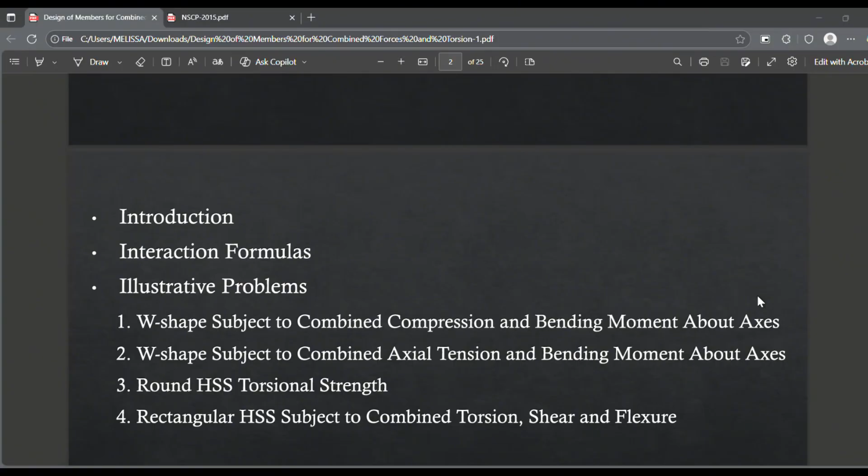In this video, I will be discussing Unit 6, which is the design of members for combined forces and torsion. We will have a short introduction, discussion of the interaction formulas, and 4 to 5 illustrative problems. After careful study of this unit, students should be able to identify different combinations of loading subjected to a structural member, compute critical stresses due to combination of loads, and design and analyze structural members for combined forces and torsion.

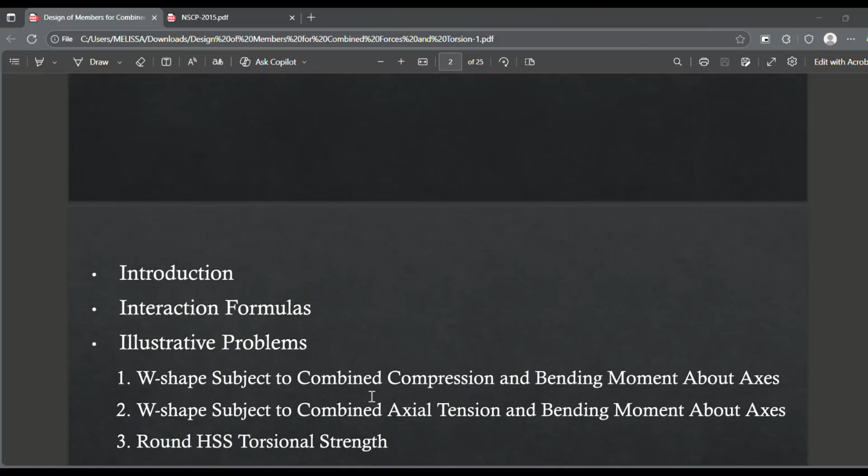This topic is a review of what we discussed in Chapter 2: tension, flexure, compression, and shear. This is now the combination of all the loadings that our structural members can experience, combined with torsion. Technically it's simple - we'll just add one formula, the interaction formula, which describes the interaction of forces and stresses experienced by our elements. Let's proceed to the introduction.

While many structural members can be treated as axially loaded columns or as beams with only flexural loading, most beams and columns are subjected to some degree of both bending and axial load. As discussed previously, elements that experience both axial and flexure are known as beam columns - members subjected to both flexural loading and axial loadings.

Columns that are part of a steel building frame must resist both bending moments in addition to the usual compressive loads due to the following: eccentricity of the compressive load, columns geometric imperfections, and wind and other lateral loads.

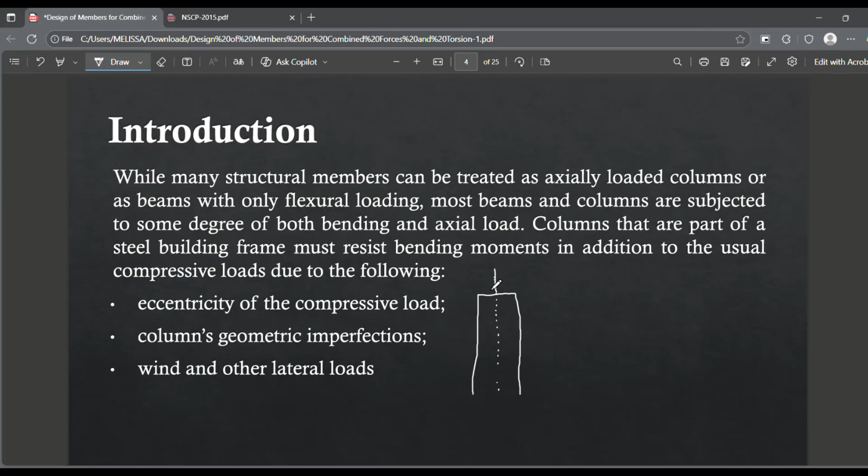We assume that our columns are subjected purely to compression. But in some instances they also experience bending moments because of eccentricity - meaning the loading is not applied directly at the center. Assume this is our column, perfectly straight, and this is the center axis. In pure compression, we assume the load is directly applied on that axis.

But due to eccentricity, there's what we call an offset. The load, instead of being at the center, is subjected somewhere off-center - that offset is what we call eccentricity. So if you have a load at that portion, aside from compression, the column can also bend, since the loading is not centered. That is the eccentricity of the compressive load.

Next is columns' geometric imperfections. The columns we construct are not perfectly straight, especially if made of concrete, due to the formwork for example. So even during construction, there's already some initial bending, which worsens once load is applied.

And then, of course, there's wind and other lateral loads - an example being earthquake loads. Our columns and elements have lateral loadings due to wind, and another example of lateral loads is earthquake loading, or the swaying of frames, also called sidesway forces. These are the three common reasons why our columns experience bending.

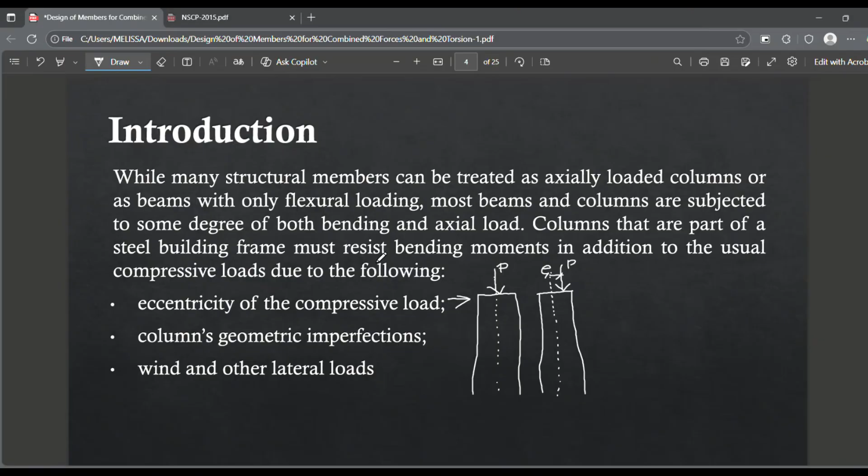Now we have the interaction formula - the relationship between required and available strength. Required strength over available strength must be less than or equal to 1.0. This is what we want as a designer: the required loading over what the element can provide must be less than or equal to 1.0, which holds true if the denominator is greater than the numerator.

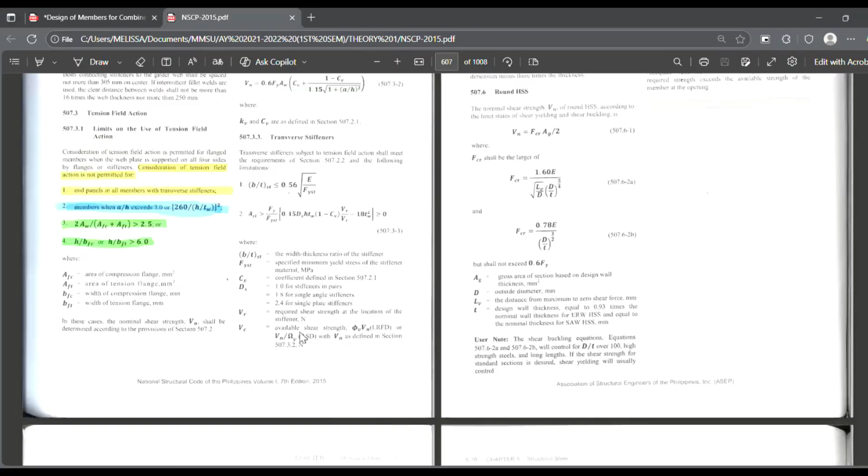So this formula is in our NSCP. Let's open our NSCP on section 508. This one, section 508. So we have here interaction formulas. Let's go one by one, we have 508.1.

This is for the doubly and singly symmetric members subjected to flexure and axial force. So 508.1 is divided into two, because we have two kinds of axial force. We have here for compression, and then another one is for tension.

So, the NSCP adopted our general formula, on which we have two cases here. If Pr over Pc, or the required strength divided by the available strength, is greater than or equal to 0.2, we will be using this formula. And then, if it is lesser than 0.2, this is the one we will use. So for the first formula, it is intended for large axial loading, and then the second formula is for small axial loading.

So this 0.2 here, there is an assumption from the AISC that at 20% of the Euler buckling load, the column deflection is minimal. So 20% is what we assume so that the bending is safe or acceptable, 20% of the available flexural or the available axial loading. So that's the code basis, the code limit of that 0.2. NSCP just adopted it.

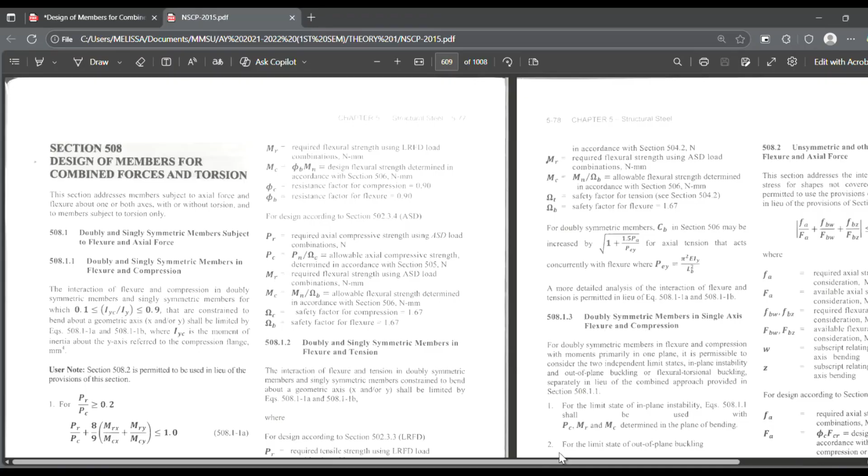And then, there are just some limitations here. We'll discuss that further in our examples. Now, we have here 508.2, unsymmetric and other members subject to flexure and axial force. This section addresses the interaction of flexure and axial stress for shapes not covered in section 508.1.

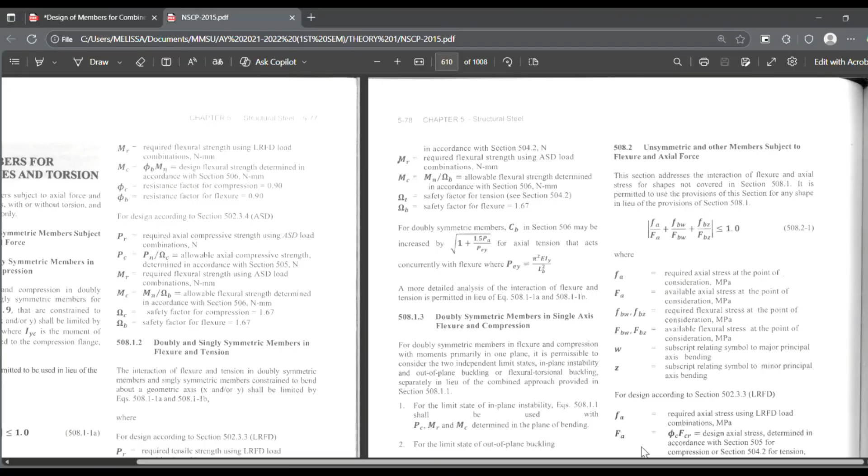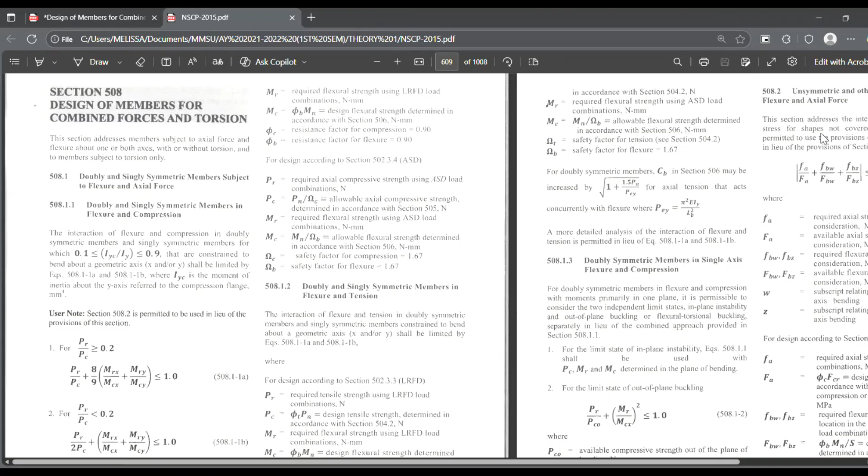It is also permitted to use the provisions of this section for any shape in lieu of the provisions of section 508.1. So 508.2 can be used as a substitute for 508.1. As noted in 508.1, section 508.2 is permitted to be used in lieu of the provisions of this section. The same is said by 508.2, so we can use 508.1 instead.

Okay, so here is its formula. What's the difference between the two? Why can we use them interchangeably? In 508.1, you'll notice the units are in Newton and Newton-millimeter, so we are talking about forces and bending moments. In 508.2, the units are in megapascal, meaning we are talking about stresses.

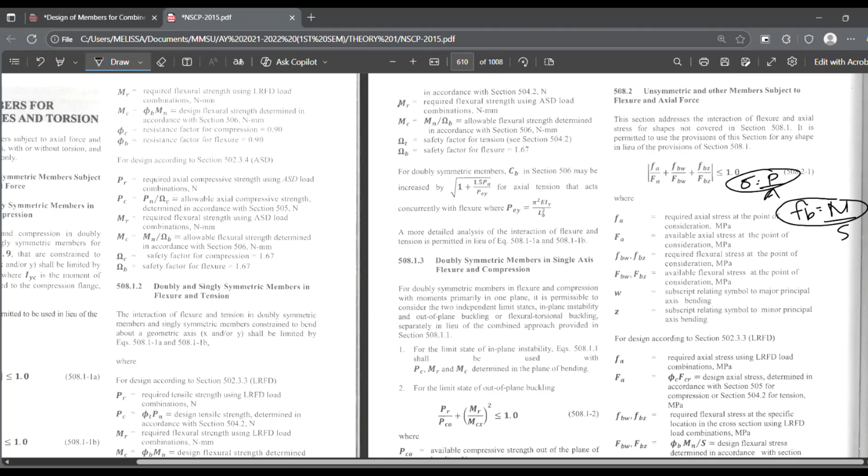So whichever you use, 508.1 or 508.2, it will most probably yield the same result. Because we know that the force or the stress is directly proportional - if we have axial stress, it is directly proportional to our load. And if we have bending stress, it is also directly proportional to our moment. So we can use either 508.1 or 508.2, depending on what the problem asks us to apply.

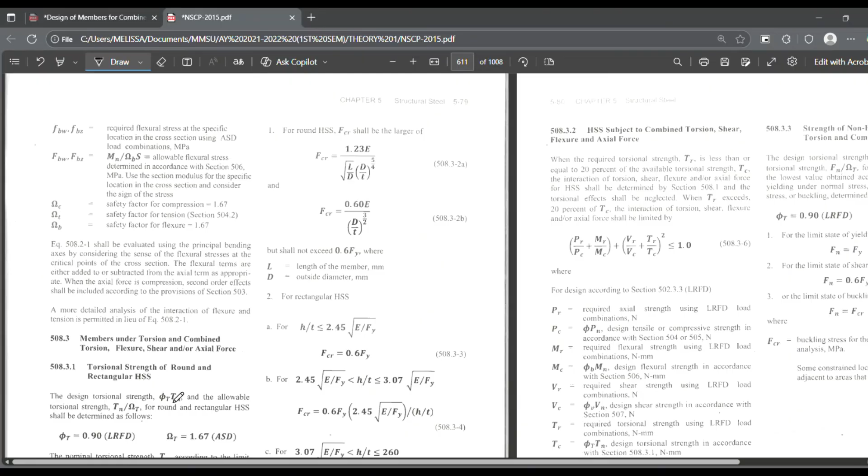Next, 508.3, we have members under torsion. Here torsion comes in, and then the combination of torsion, flexure, shear, and other forces. And of course we have HSS and so on. So let's go back to these provisions from NSCP as we proceed to our examples later on.

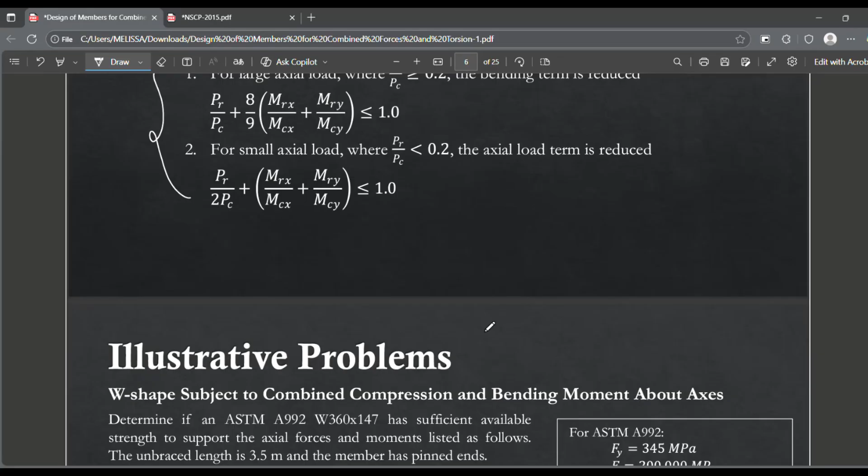So our PR required, how do we compute that? PR, MR can be computed using what we use, that is the PU - 1.2 PD plus 1.6 PL. Usually this is what we use, so this is our required PR. For LRFD. For ASD, of course we have PD, the dead load plus live load. The moment or the flexural strength is also the same as how we get it during flexure.

What about the PC, the available? How do we compute that? With the use of the limiting states. So this is just a review of what we've done from Unit 2 up to shear, just a refresher. Except it's a bit more laborious because we are not only dealing with one force or one stress anymore - we are dealing with two or more forces or stresses. So every problem may take more than 30 minutes to 1 hour.

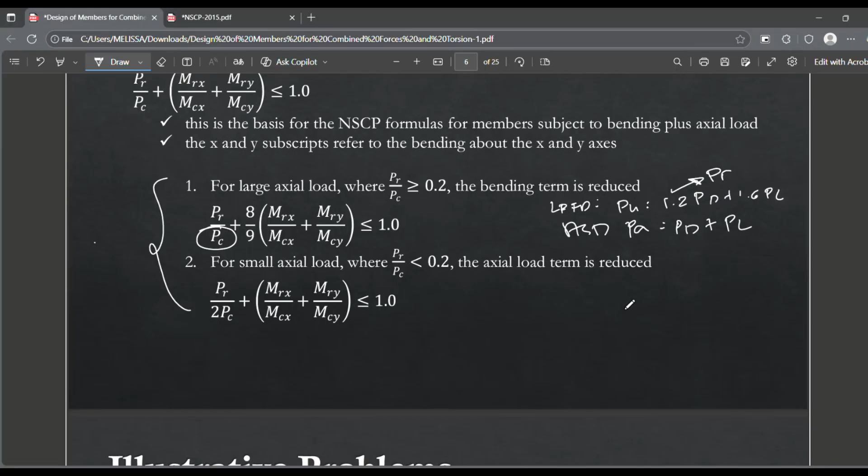Okay, let's have illustrative problem 1. We have a W shape subject to combined compression and bending moment about an axis. Determine if an ASTM A992 W360 by 147 has sufficient available strength to support the axial forces and moments listed as follows. The unbraced length is 3.5 meters and the member has pinned ends.

So given are our required values - these are the required forces and the flexural strength - no need to compute for the required. I've also given here the geometric properties of our section. So let's start. Again, this is the combination of compression and bending moment or flexure, so compression plus flexure. Let's begin with compression.

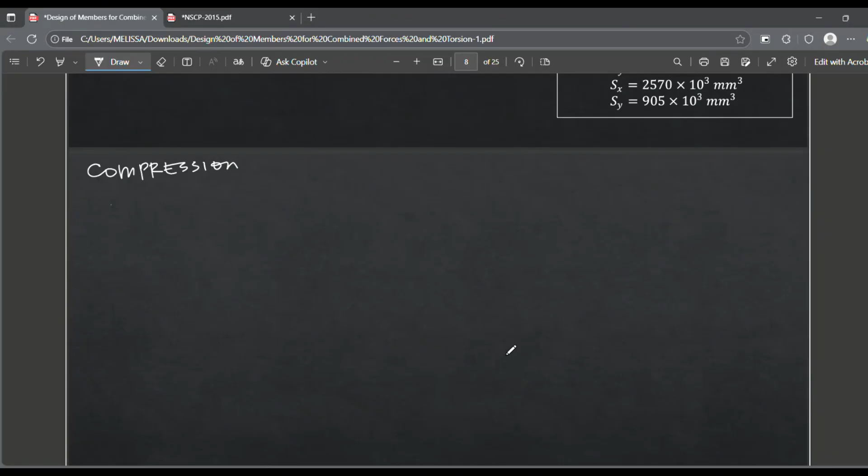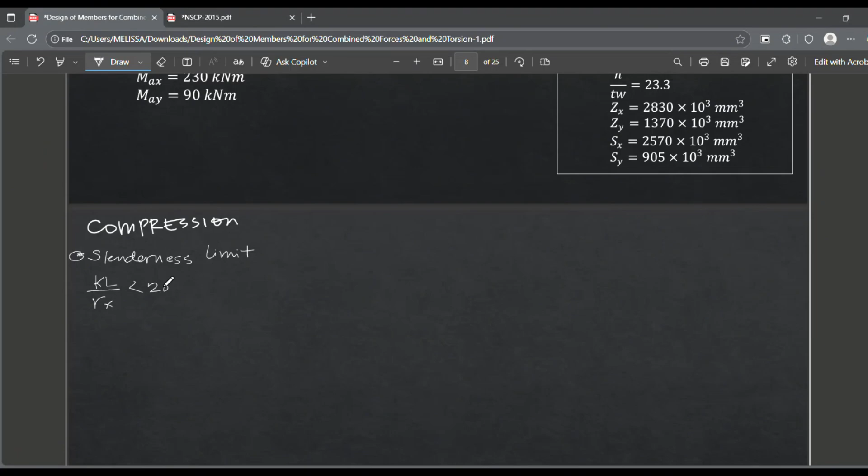In compression, the first step is to check the slenderness ratio, or slenderness limitation. We have KL over R along X must be lesser than 200. Our section has pinned ends, therefore K is equal to 1.0. The length, we have 3,500, divided by Rx which is 157. So this is equal to 22.293, which is lesser than 200 - passed.

Next, KL over RY. We have 1.0 times 3,500 divided by 94.2. So we have 37.155. They are within the limit, but this one will govern.

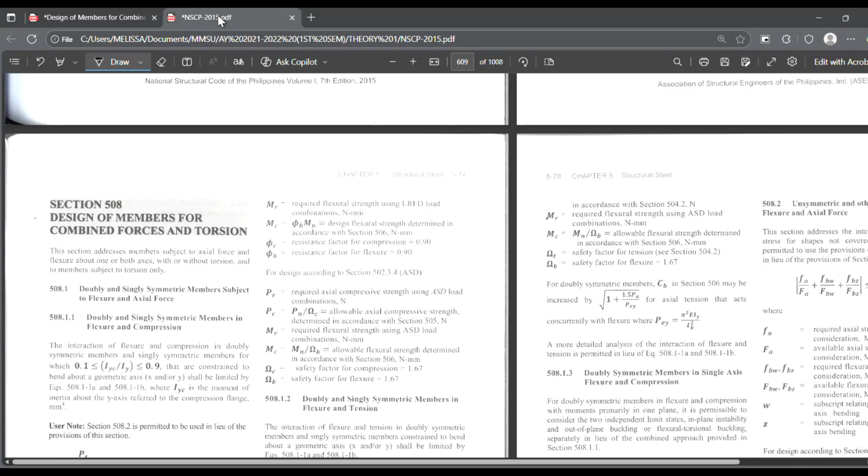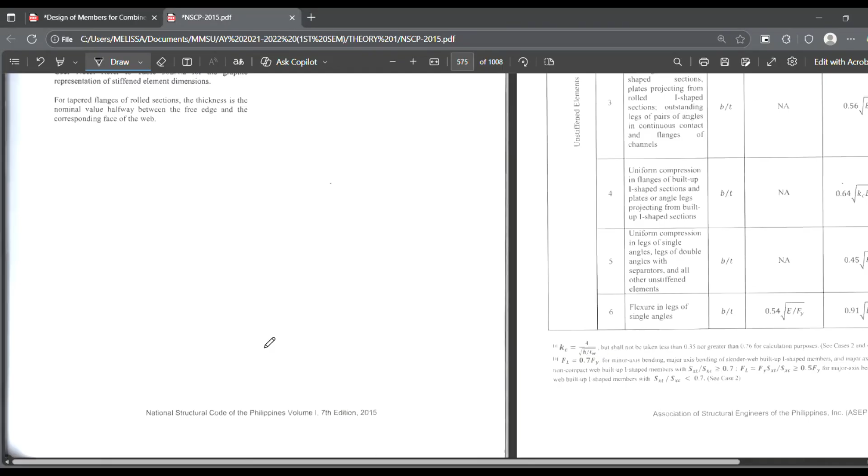Next is to check the slenderness of the elements. Our section is a wide flange, so we have unstiffened and stiffened elements. Let's start with the flange for the unstiffened. Open your NSCP on section 502, table 502.4. We have unstiffened elements for flange, wide flange, so we will utilize case number 3 with thickness ratio B over T, and then we have 0.56 times the square root of E over FY, case 3. For the web, I think we have case number 10 - uniform compression in webs. So this is the width thickness ratio, and this is our lambda R.

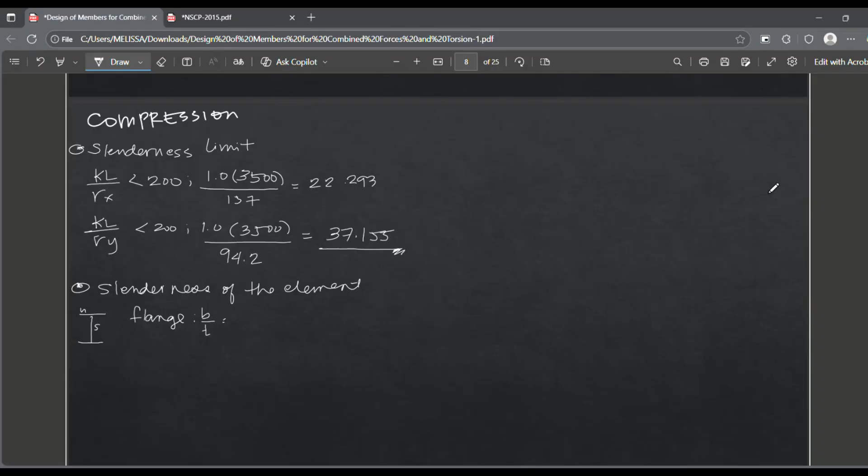So flange. We have B over T equal to BF over 2TF, which is equal to 9.34.

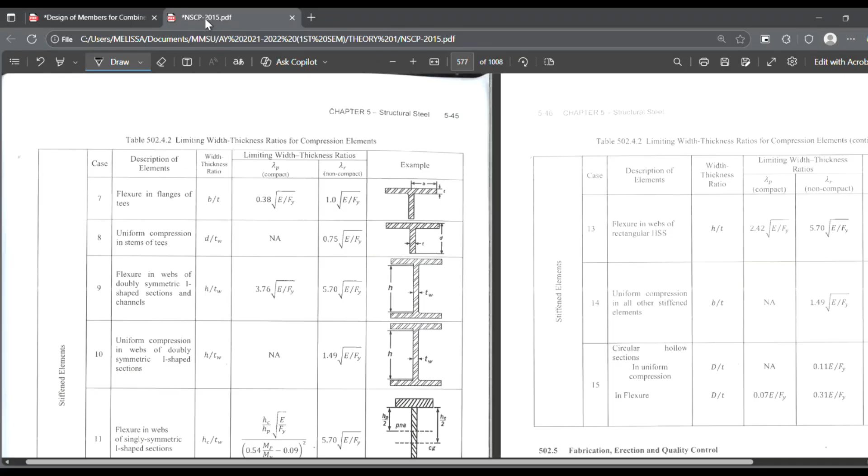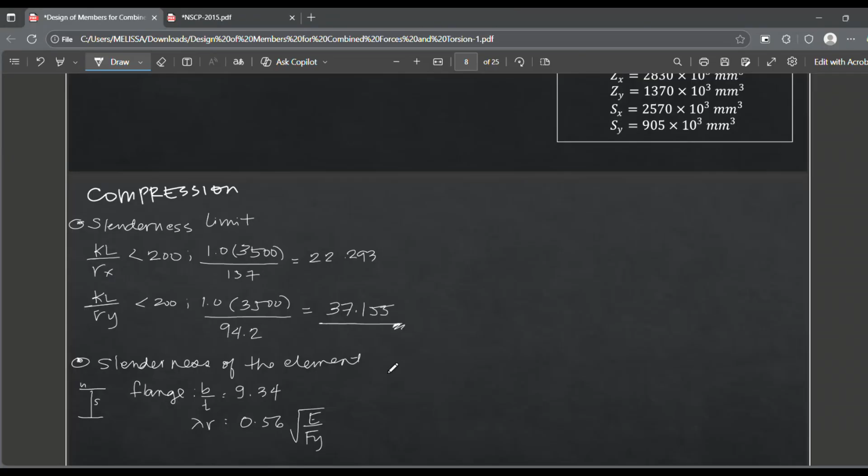Next, the lambda R for the flange. We have 0.56 times square root of E over Fy. Our modulus of elasticity is 200,000, and our material is A992, so Fy is 345. Computing this, we get 13.483. Therefore, this section, the flange, is considered non-slender.

Next is for the web. We will use case number 10. So H over TW, thickness ratio is 23.3. And the lambda R is equal to 1.49 square root of E over Fy, which computes to 35.875. So both are non-slender.

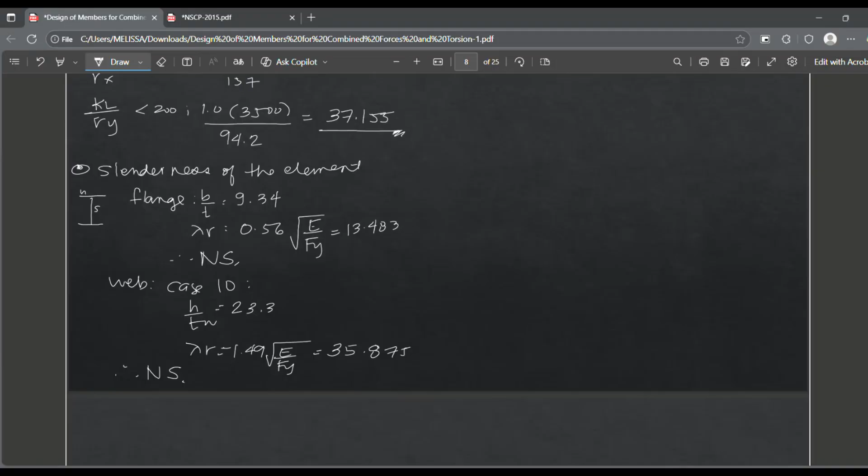So the flange is a non-slender element and the web is also a non-slender element. After that, let's proceed to section 505, design of members for compression. Since both are non-slender, let's check section 505.3: compressive strength for flexural buckling of members without slender elements. This section applies to compression members with compact and non-compact sections, or non-slender elements as defined in section 502.

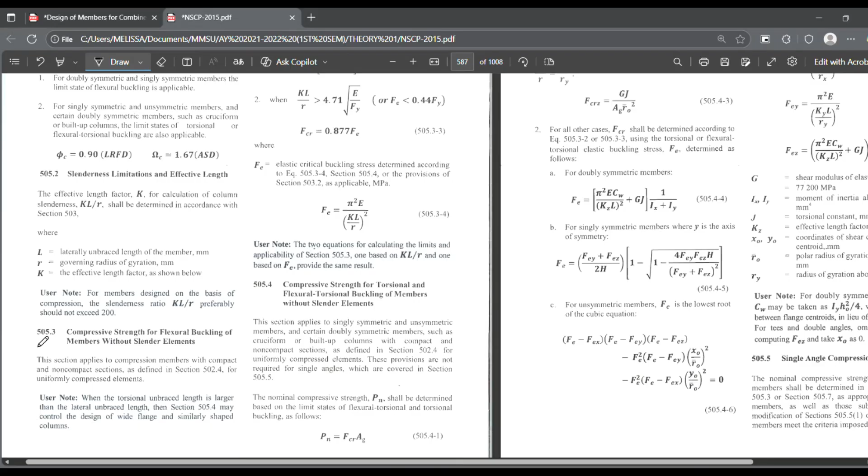So it falls under 505.3. Next, 505.4: compressive strength for torsional buckling without slender elements. This section applies to singly symmetric and unsymmetric members, and certain doubly symmetric members such as cruciform or built-up sections. Our section is a wide flange, doubly symmetric, but it doesn't fall here because it needs to be cruciform or built-up. Therefore, only 505.3 is applicable, where the nominal compressive strength is equal to FCR times AG.

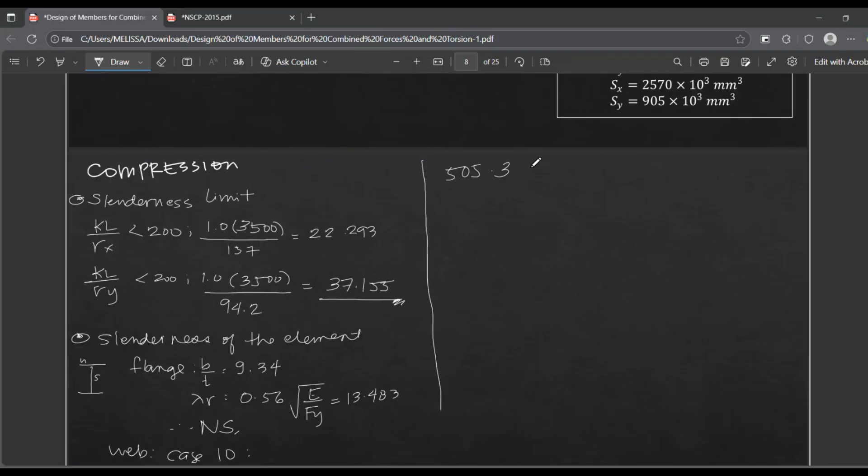But before we compute FCR, we need to compare the elastic critical buckling stress with 0.44 Fy, and see where it falls. Under 505.3, the limiting state is flexural buckling, where the nominal compressive strength equals FCR times AG. We compare with 0.44 Fy. Our Fy is 345, so 0.44 times 345 is 151.8 megapascal.

Next is the elastic buckling stress: pi squared E over (KL over R) squared. So pi squared times 200,000 divided by the governing KL over R, which is 37.155 squared. Therefore, this is equal to 1429.866 megapascal. Therefore, our Fe is greater than 0.44 Fy.

Therefore, our FCR uses the formula 0.658 raised to Fy over Fe, multiplied by Fy, since Fe is greater than 0.44 Fy. So 345 divided by 1429.866, multiplied by 345. This is equal to 311.861 megapascal.

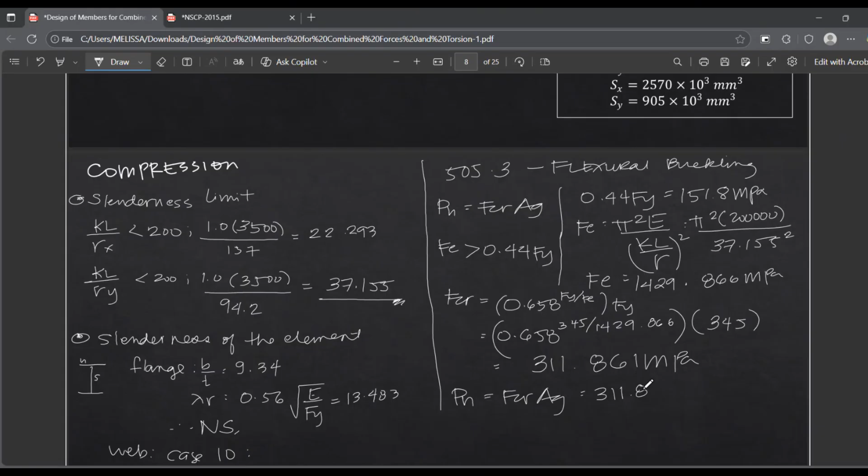Therefore, the nominal compressive strength is equal to FCR times AG. So 311.861 multiplied by the gross area, 18,800 millimeter squared. This gives Newton per millimeter squared, which cancels out. Let's convert into kilonewton: we get 5862.98 kilonewton.

But we need under LRFD the design strength, phi Pn. Our phi is 0.9, so this is equal to 5276.68 kilonewton.

So phi Pn, the design strength, is 5276.68 kilonewton. And then under ASD, we have Pn over omega, which is 3510.765 kilonewton. So these are now the available strengths.

So what is the required? That's the given: required under LRFD is 1,900 kilonewton, and under ASD is 1,200 kilonewton. So it's safe, since 5276.68 is greater than 1,900 kilonewton, and 3510.765 is greater than 1,200 kilonewton. In summary, this is what we call PC, the available, and the 1,900 and 1,200 are what we call PR, the required. So it's safe for compression.

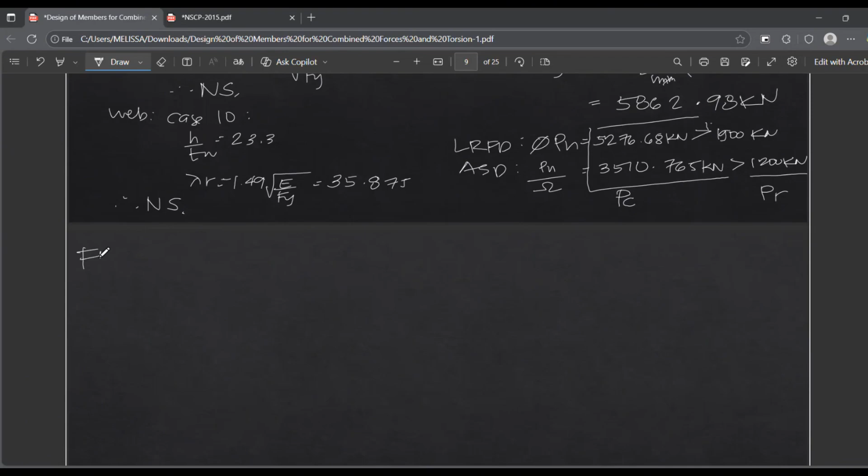Now, the problem gave us the required moments. We notice we have moment along X and moment along Y, meaning the bending is happening on both axes, X and Y. So what we'll do is identify the flexural strength along the X-axis first, then do the weaker axis later. This is going to be a long task. So, flexure—what's the first thing we do for flexure?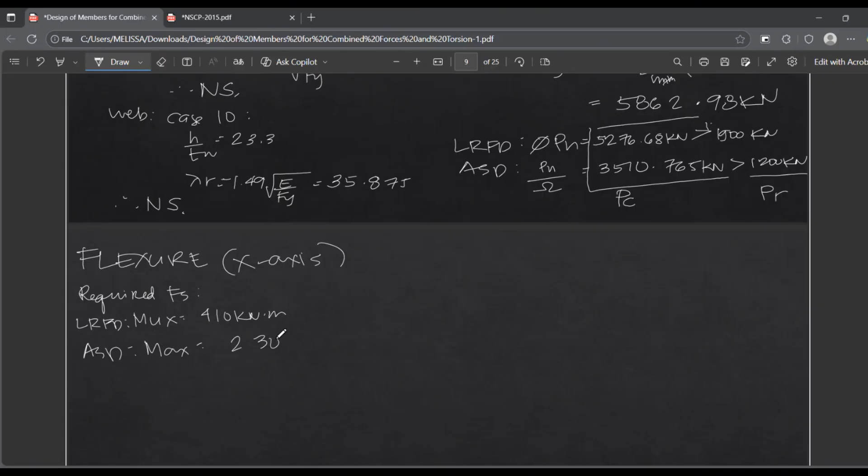Okay, given na yung required. Required flexural strength, under LRFD we have 410 kilonewton meter. And for ASD, we have 230 from earlier. So max is 230 kilonewton meter. 410 and 230. Next is the slenderness.

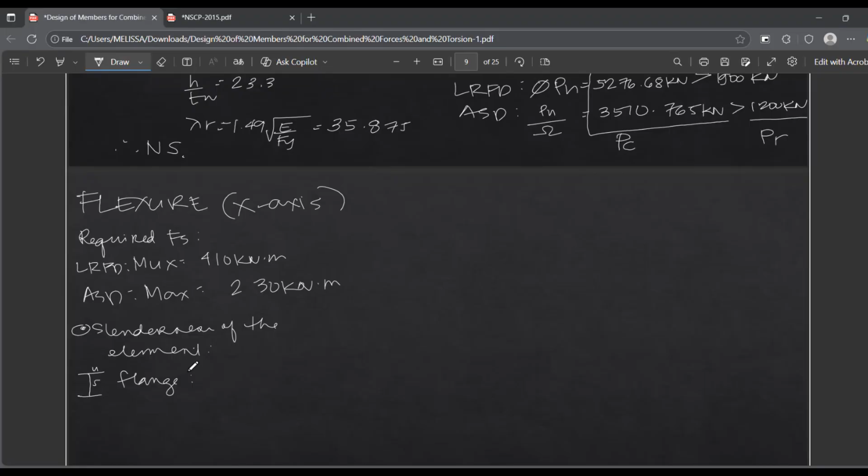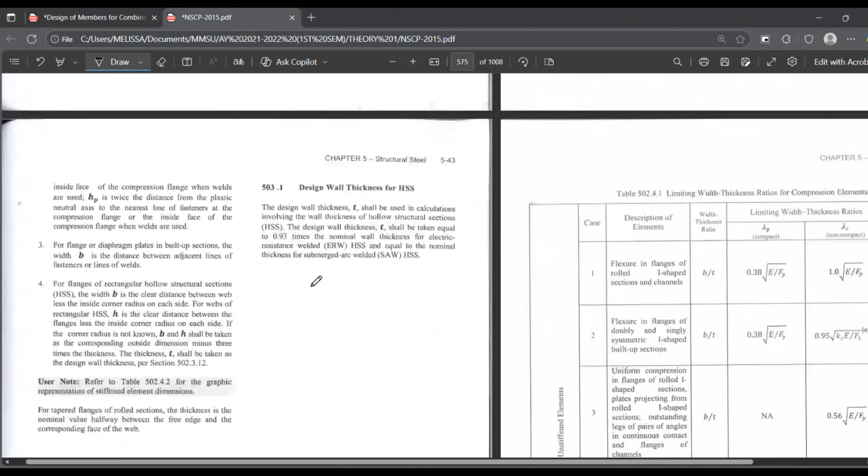Slenderness of the element. We're in flexure now, so let's start with the flange, unstiffened. Flange is different here since that was for compression; now we're in flexure, so table 502.4.2, case number 1: flexure in flanges of rolled I-shaped sections and channels.

We have the width-thickness ratio, B over T. Lambda P is 0.38 square root of E/Fy, and Lambda R is 1.0 square root of E/Fy. That's for the flange. For the web, continuing so we don't have to go back, we use case number 9: flexure in webs of doubly symmetric I-shaped sections and channels. H/Tw, with 3.76 square root of E/Fy and 5.7 square root of E/Fy.

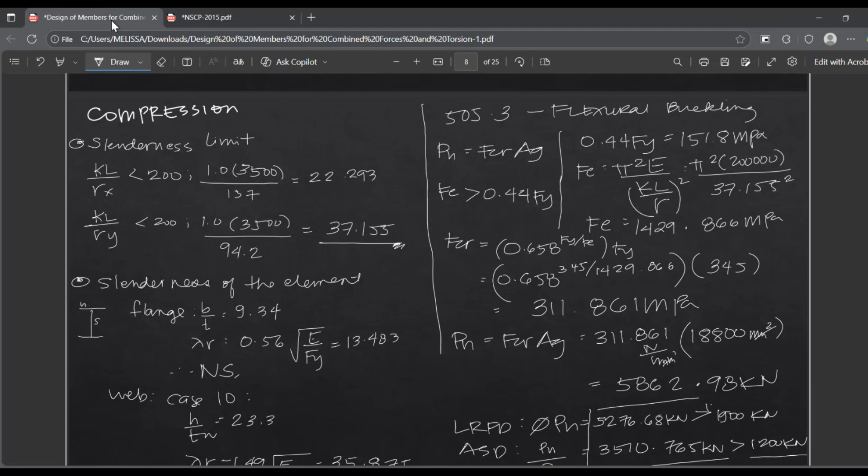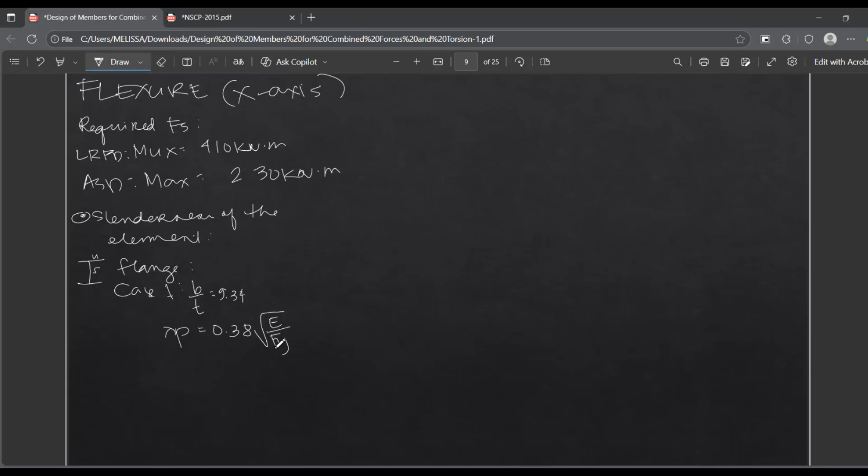Let's start with the flange, case number 1. Our B over T is just BF over 2TF, which equals 9.34. Next, Lambda P equals 0.38 square root of E/Fy. With Fy equal to 345, we get 9.149. So 9.34, or B over T, is greater than Lambda P.

Therefore we need to compute Lambda R, equal to 1.0 square root of E/Fy, which equals 24.072. So B over T is 9.34, Lambda P is 9.149, Lambda R is 24.072. Therefore the flange is considered non-compact.

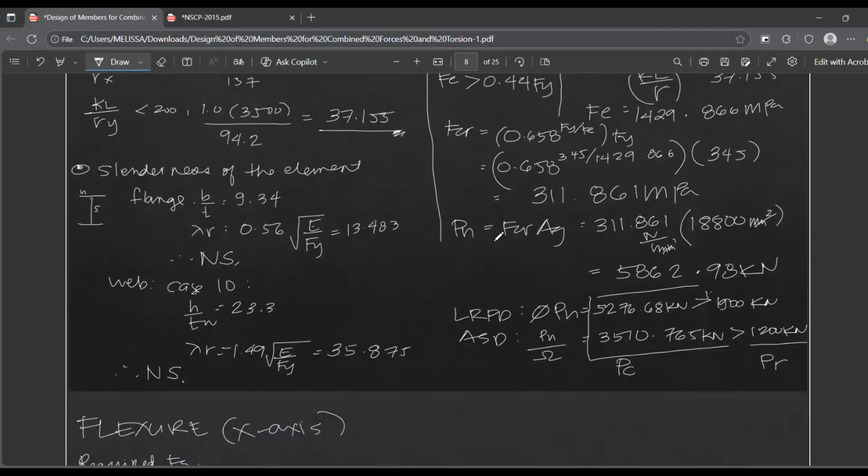Next, for the web, we use case number 9. What is our H/Tw? We have 23.3. Width-thickness ratio is 23.3. Next, Lambda P is 3.76 square root of E/Fy, which equals 90.53. So 23.3 is lesser than 90.53.

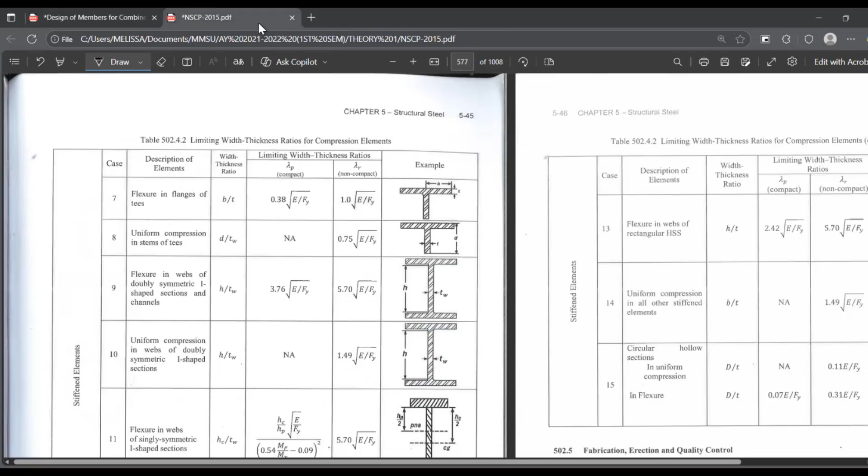Therefore the web is considered compact. So the flange is non-compact, the web is compact, and we already know it's non-compact. Let's go to table 506.1.1.

Our section is wide flange, loaded on the x-axis. Non-compact, then compact—wait, non-compact and compact, yes. Therefore we will use section 506.3. The limit states are two: lateral torsional buckling and flange local buckling.

Let's proceed to compute the available flexural strength. According to 506.3, there are two limit states: lateral torsional buckling and flange local buckling. Section 506.3 covers doubly symmetric I-shaped members with compact webs and non-compact or slender flanges, bent about their major axis.

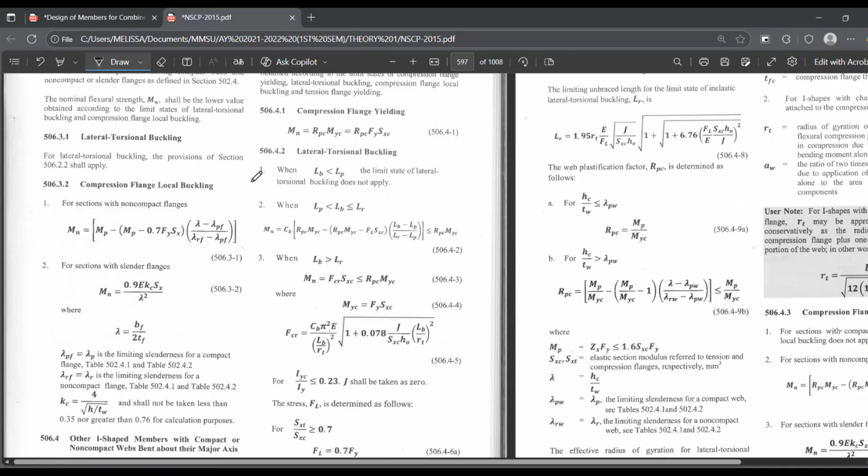For lateral torsional buckling, the provisions of section 506.2.2 shall apply. LTB is under 506.2.2, so let's find that—506.2.2, lateral torsional buckling. Here, when computing for LTB, the limit states require us to compare LB, LP, and LR, the limiting lengths.

LB is the unbraced length, which is 3,500 millimeters. LP is 1.76 times RY square root of E/Fy. The radius of gyration on the y-axis is 94.2, so 94.2 multiplied by square root of 200,000 divided by 345. So LP equals 3991.802 millimeters. So 3,500 is lesser than 3991.

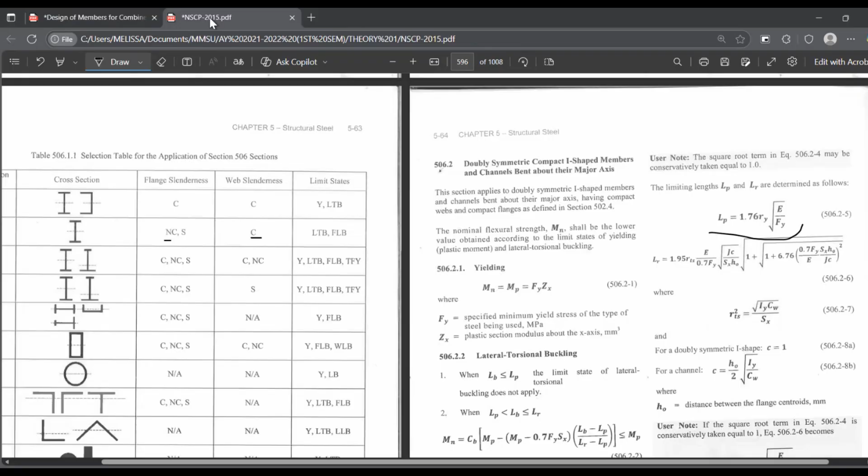So there's no need to compute LR, because LB is now lesser than LP. If LB is lesser than LP, therefore the limit state of lateral torsional buckling does not apply. So LTB does not apply. We're done with LTB.

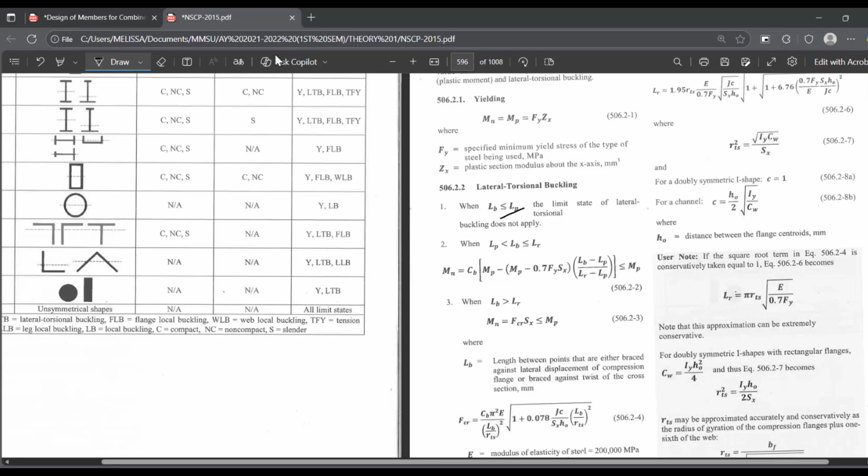Next, let's proceed to flange local buckling. What is the formula for flange local buckling? Let's go back to 506.3.

Compression flange local buckling: for sections with non-compact flanges, use this formula for the nominal flexural strength. Since our flange is non-compact, we automatically use this formula: MnX equals MP minus MP minus 0.7 Fy Sx, times lambda minus lambda PF over lambda RF minus lambda PF. We have MnX since we're on the x-axis, so let's label it with x to avoid confusion.

So MnX equals MP minus MP minus 0.7 Fy Sx, times lambda minus lambda PF over lambda RF minus lambda PF. What is our plastic moment? Plastic moment equals Fy times Zx, and we're on the x-axis, so Fy Zx. We have 345. What is our plastic section modulus Zx? 2830 times 10 raised to 3.

2830 times 10 raised to 3. So the plastic moment is equal to 976.35 times 10 raised to 6 Newton dot millimeter. Let's store that in A so it's faster for us.

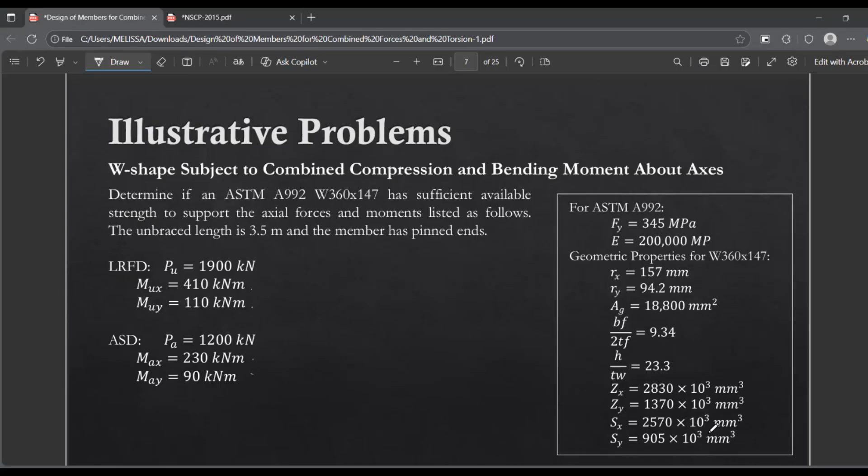MP is 976.35, store natin. And then 0.7 of 345. And the section modulus along X, SX, is equal to 2570 times 10 raised to 3.

Lambda, flange lang tayo nakatingin. Lambda is 9.34. MNX is equal to, A minus 0.7 of 345 by 2570 times 10 raised to 3.

Idagdag natin ngayon, lambda is 9.34 minus lambda PF 9.149, all over 24.072 minus 9.149. Pasensya na po kayo sa sulat, mahirap magsulat.

MNX is equal to 963.865 times 10 raised to 6 Newton dot millimeter.

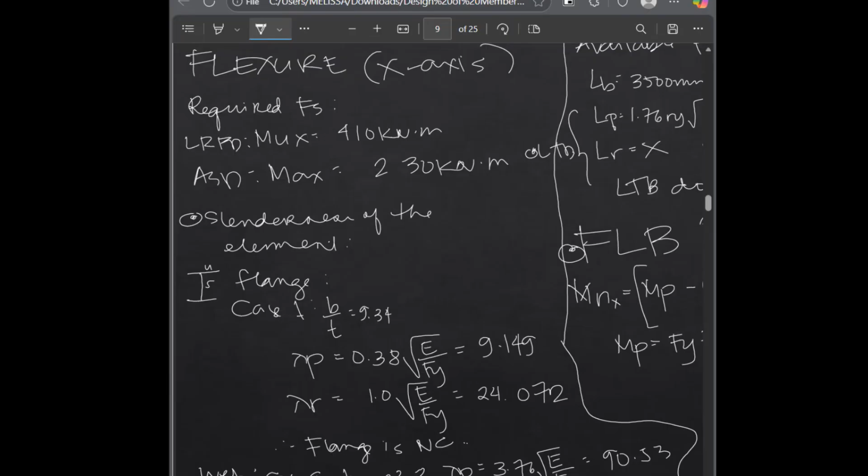So we will be using the smaller value, kasi sabi dito sa NSCP, paulit-ulit na lang itong binabanggit sa NSCP, the nominal flexural strength shall be the lower value obtained according to the limit states of lateral torsional buckling and compression flange local buckling. Okay na tayo along X.

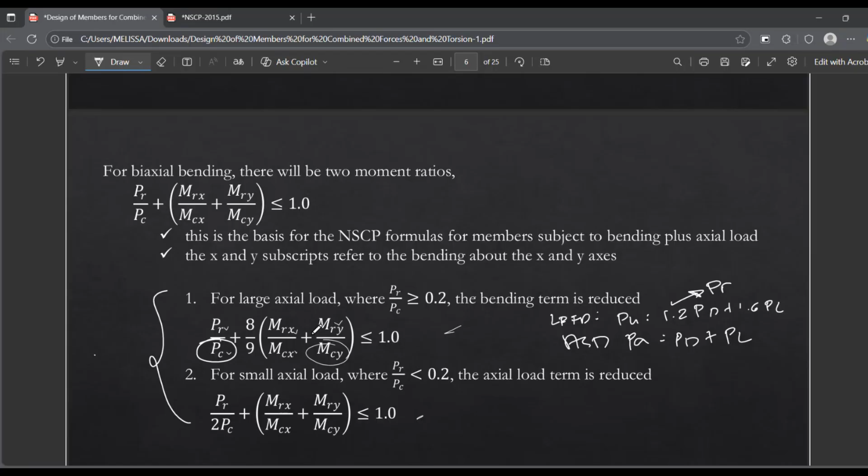Kung balikan natin yung flexure formula, hindi pa natin alam kung saan dito yung mag-a-apply, kung dito, this formula. But anyway, they require same missing values naman. Meron kang PR, okay na tayo dyan, PC, okay na rin, MRX okay na, MCX okay na, MRY given. Ito na lang yung wala tayo, the flexural strength along the Y-axis if it is loaded on the Y-axis.

Okay, so again, flexure ulit tayo, kaso nga lang Y-axis naman. So ano yung required dito?

We have here MUY, pag LRFD. Pag ASD, we have MAY. Given yan, so we have 110 tsaka 90, 110 and 90.

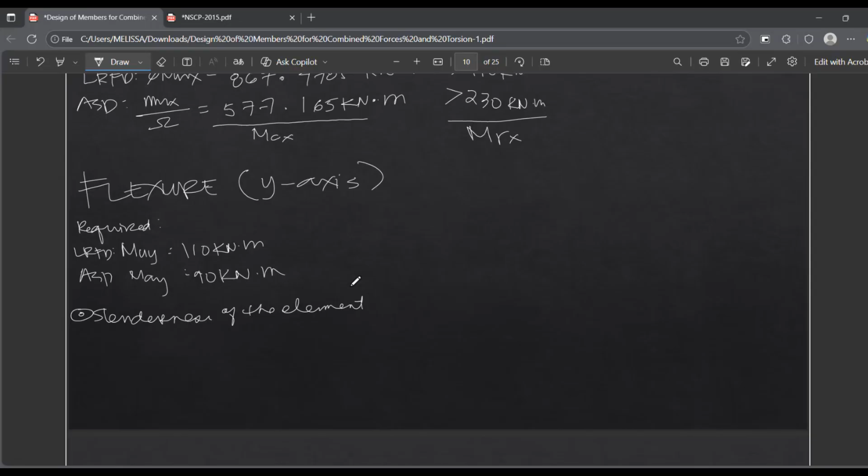Okay, next, susunod dito is yung tawag dito, yung slenderness of the element, di ba? Pero hindi naman na kasi magbabago eh. May it be loaded on the X or Y axis, same lang yung magiging slenderness of the elements. Pwede nyo nang i-utilize yung ginamit nyo dito kanina.

We know that the flange is non-compact, tsaka web is compact. Flange is non-compact, tapos si web is compact.

Again, y-axis, ganito po yung magiging orientation niyan, sa table 506.1.1. It is being loaded on its minor axis or the weaker axis, may bending on the weaker axis dito. Dito naman kanina, on the x-axis, ganyan naman, basta ganyan.

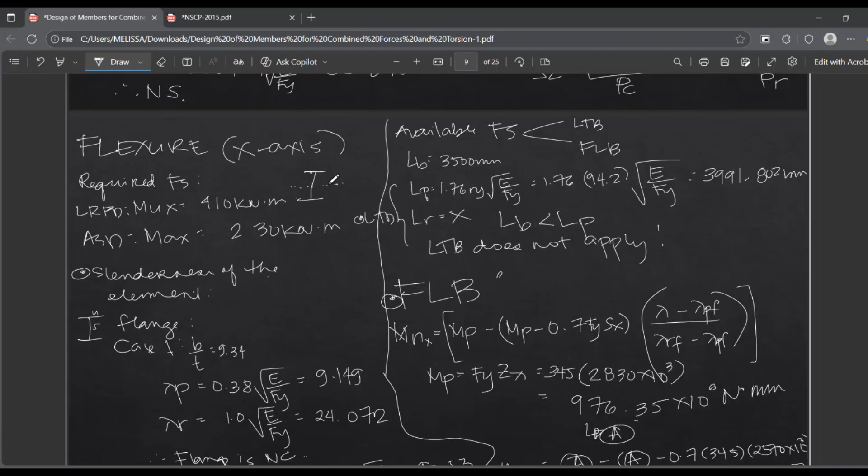Okay, so here, loaded on its x-axis. The loading is there, or that's where the bending will happen, okay?

506, let's go back to 506.1. So our illustration is loaded or bending on its y-axis, and most probably this one. Our flange is non-compact, web slenderness is not applicable, so we will be using 506.6. So the limiting state is yielding, and flange local buckling.

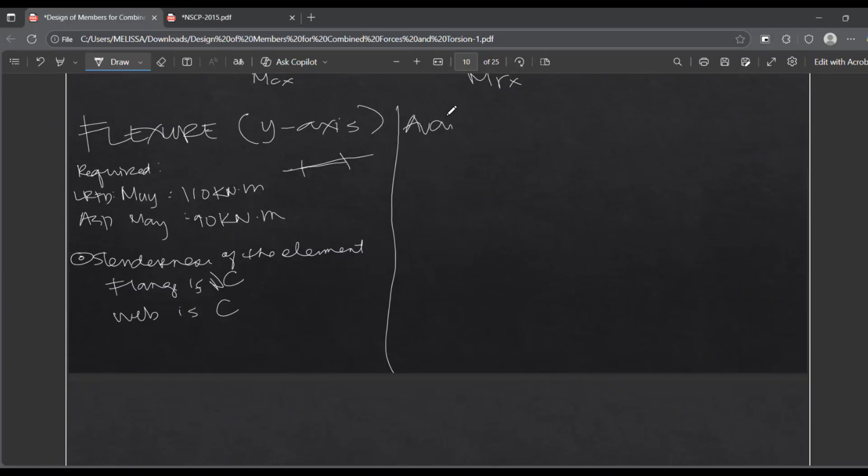We now have available flexural strength. According to NSCP, the limiting states are yielding, and flange local buckling. Okay, let's start with yielding.

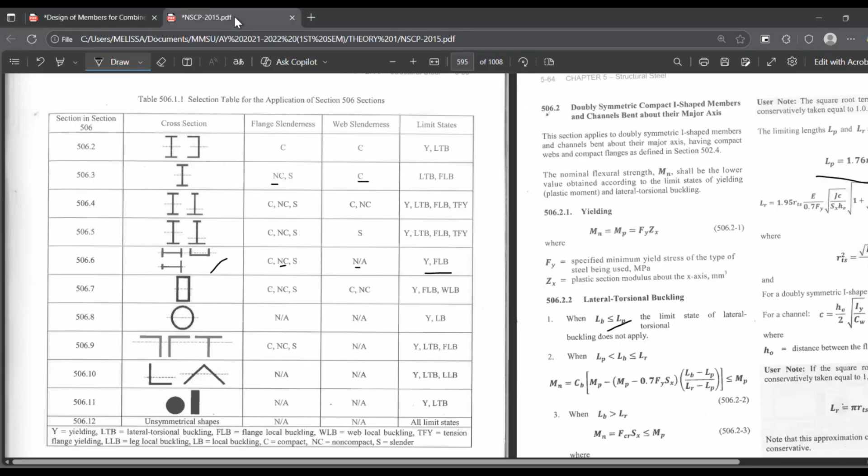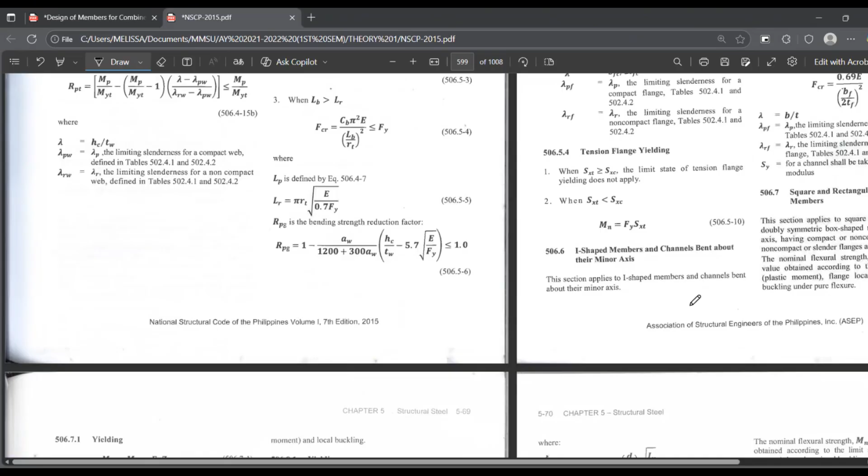So for yielding, we have here 506.6, this section: I-shaped members and channels bent about their minor axis. So this section applies to I-shaped members and channels bent about their minor axis. So for yielding, Mn is equal to the plastic moment, equal to Fy Zy, but it must be lesser than or equal to 1.6 of Fy Sy.

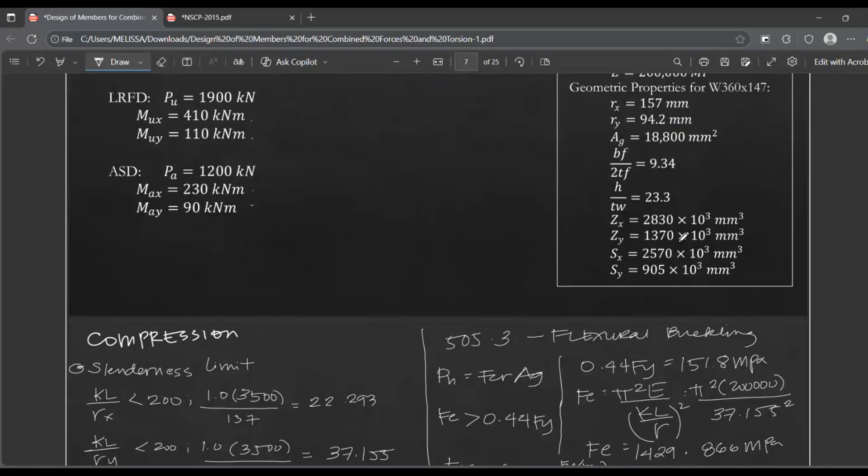Okay, so our Fy is 345. What is the section modulus? Zy, the plastic section modulus, is 1370 times 10 raised to 3.

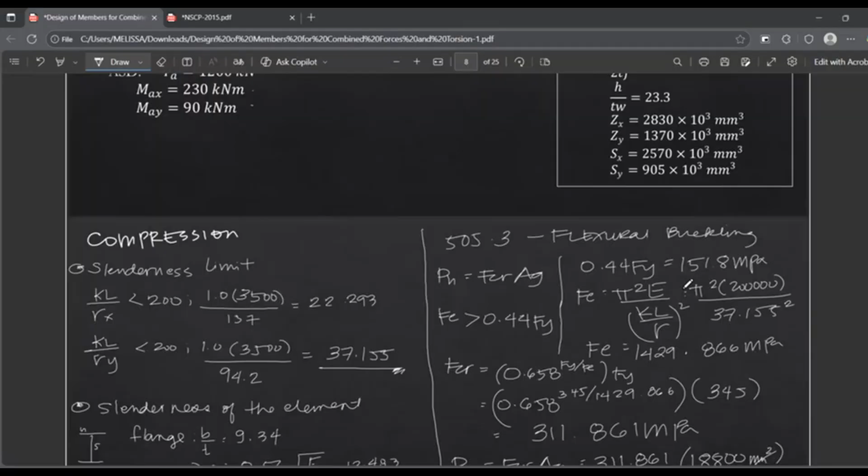But it must be lesser than or equal to 1.6 of 345. Sy is 905 times 10 raised to 3.

So this is equal to 472.65 times 10 raised to 6 Newton-millimeter. And it is lesser than... is it lesser than? What is that one? So 499, yes it is lesser than. So we have here 499.56 times 10 raised to 6 Newton-millimeter.

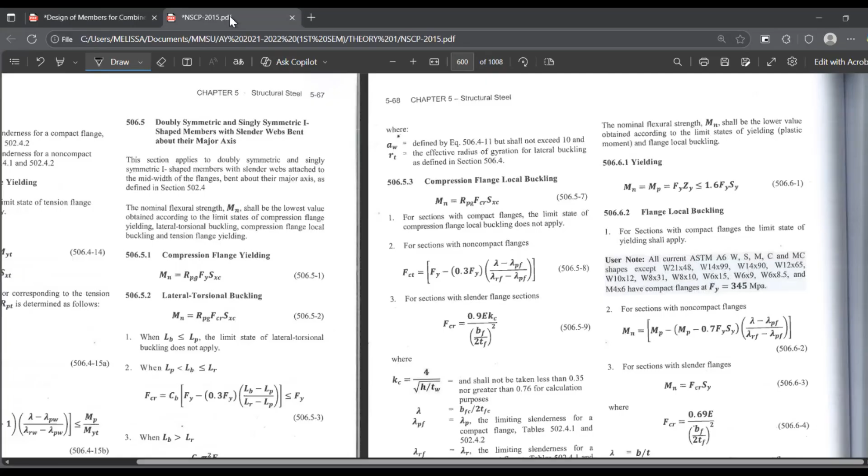Okay, let's proceed to the second limiting state, the flange local buckling. For sections with compact flanges, the limit state of yielding applies, but that doesn't apply here since our flange is non-compact. Therefore, we will use this formula.

Mn is equal to Mp minus Mp minus 0.7 Fy Sy, times lambda minus lambda Pf, all over lambda Rf minus lambda Pf.

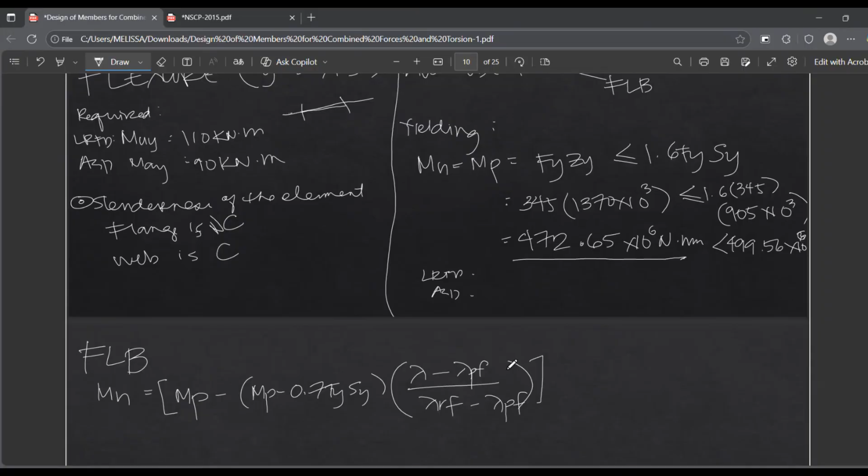So our plastic moment is just this one, 472. Store that in A so it's faster, for the Mp. So A minus 0.7 of 345, Sy is 905 times 10 raised to 3.

What is our lambda here? We're focused on the flange since it's non-compact. 9.34, 9.149, 24.077. So: 9.34 minus 9.149, all over 24.077 minus 9.149.

So Mn is equal to 469.399 times 10 raised to 6 Newton-millimeter. Comparing the two, the nominal flexural strength: we have 472 versus 469. Therefore this will govern, this prevails between the two.

Since we now have a value for nominal flexural strength, we can compute the available strength. For LRFD, phi Mn is equal to 422.439 times 10 raised to 6 Newton-millimeter, but let me convert that to kilonewton-meter. And for ASD, Mn over omega is equal to 281.077 kilonewton-meter. These values are what we call MCY.

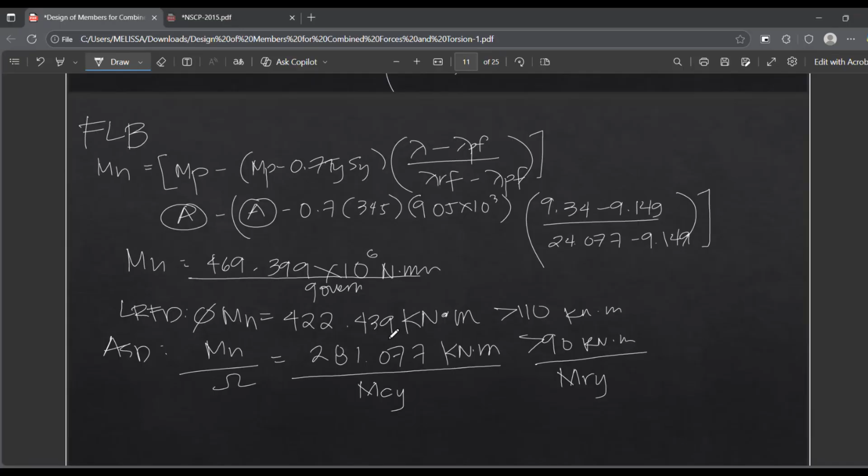So if we load these moments or forces individually on our section, it's considered safe. So the question is, what if the forces and bending moments act simultaneously on our element? Is it still safe? That's where the interaction formula comes in. For the interaction formula, we first need to identify if PR over PC is greater than or lesser than 0.2. Let's start with LRFD.

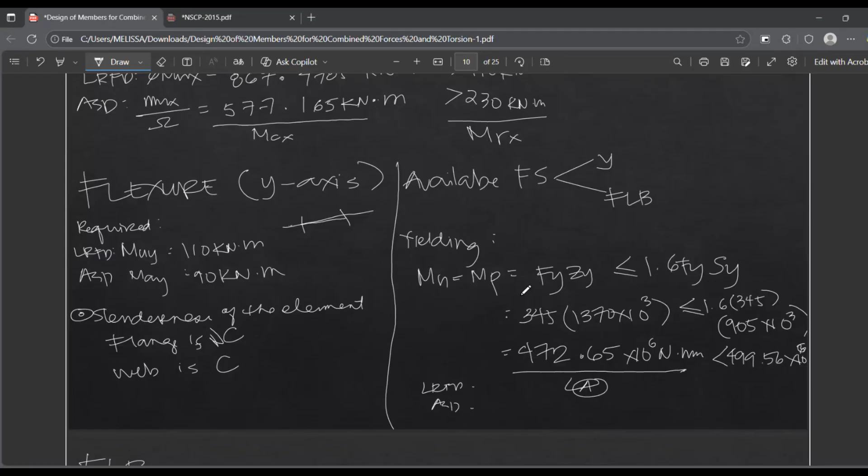PR over PC, what is our PR here? Let's go to compression. PR, there it is, LRFD first, guys: 19 over 5276.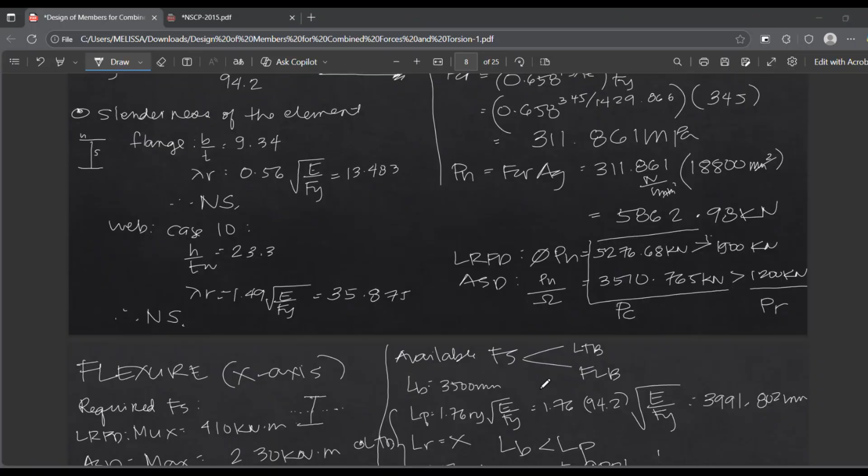19 divided by 5276.688. So this is equal to 0.36, which is greater than 0.2. So PR all over PC is greater than 0.2.

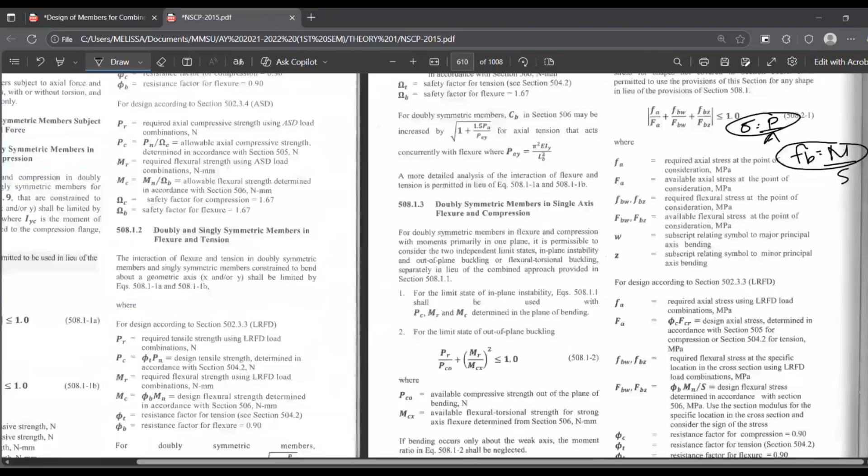Therefore, balik tayo sa NSCP. We will be using what interaction formula? Since PR all over PC is greater than 0.2, ito po yung gagamitin natin, this interaction formula.

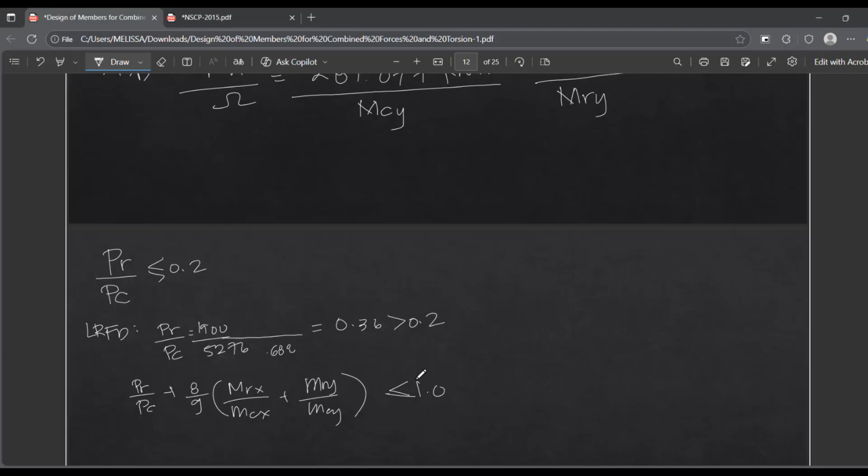PR over PC plus 8 over 9, MRX over MCX plus MRY over MCY, and it must be lesser than or equal to 1.0 para makonsider siya na safe. Okay, so PR all over PC, sige, substitute na po natin.

Dito na, 1900 divided by 5276.688 plus 8 over 9. Okay, so MRX tayo, tsaka MCX, under LRFD muna ha, LRFD. So dito muna tayo.

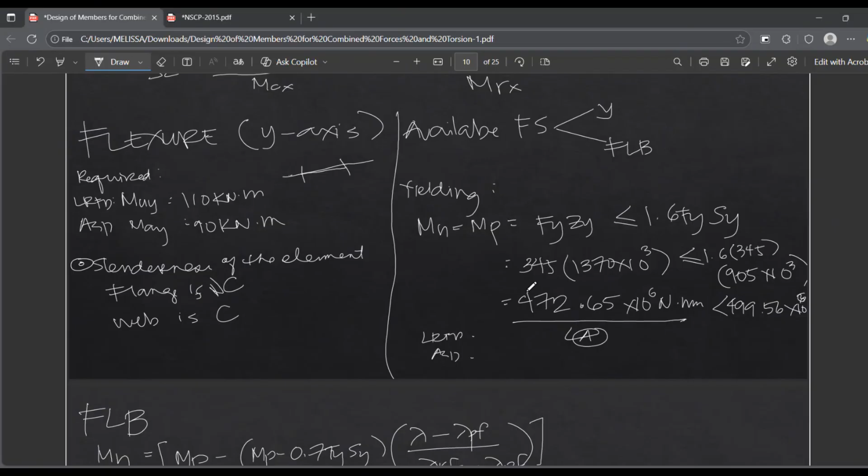Ayan, this is your MRX, this is your MCX. So we have 410 tsaka 867. 410 all over 867.479 plus, okay, Y na tayo.

LRFD lang din ha, ayan, LRFD. So this is our MRY, this is our MCY, so 110 tsaka 422. 110 divided by 422.459. Okay, so is it lesser than or equal to 1.0?

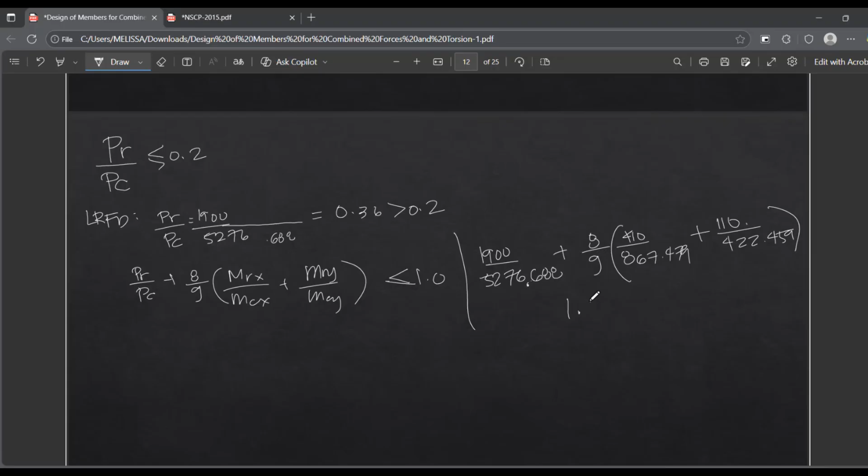Okay, so that is equal to 1.012, is greater than 1.0. Therefore, the section is not adequate.

Adequate, okay. LRFD, ASD, ganun din yung gagawin natin. To compare PR all over PC is greater than or equal to 0.2. ASD naman tayo ngayon nakatingin, guys, ASD.

This one, we have 1,200 divided by 3,510. PR all over PC: 1,200 divided by 3510.765. So this is equal to 0.34 and it is also greater than 0.2.

Therefore, we will be using the same formula. Ito, direct substitution na natin. So what is PR here? We have 1,200 divided by 3510.765 plus 8 over 9, ASD MRX.

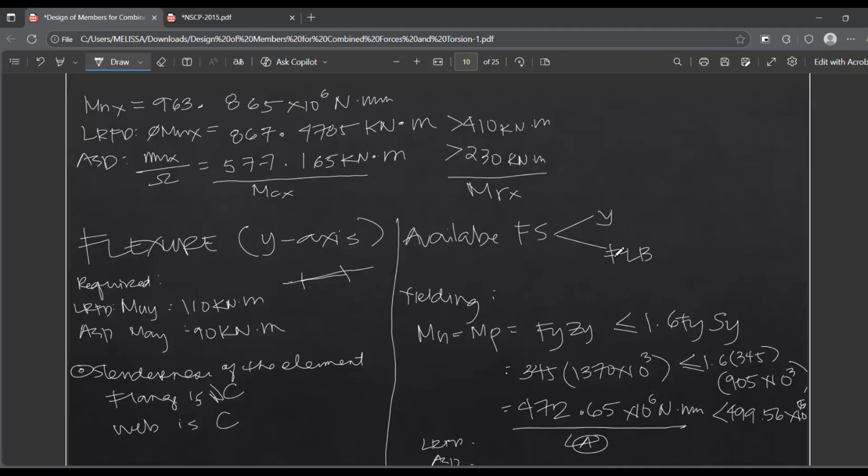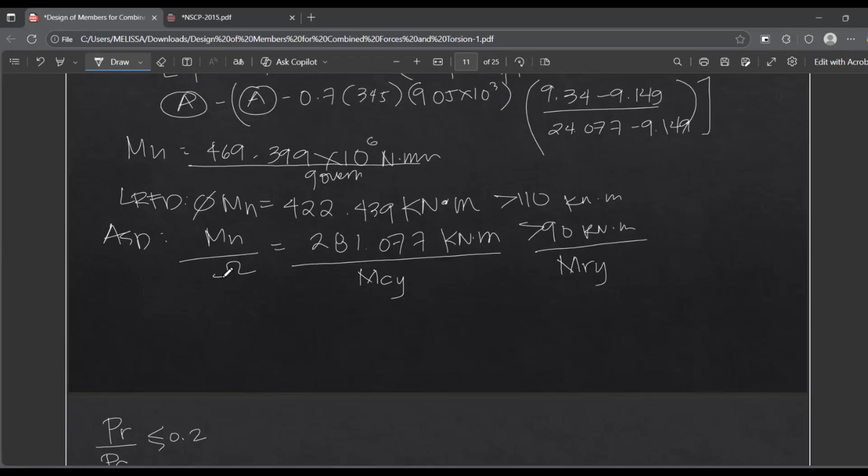ASD, this one, ASD 230 tsaka 577. 230 all over 577.165 plus yung Y naman natin, this one, ito 90 tapos 281, 90 divided by 281.077. So is it lesser than 1.0?

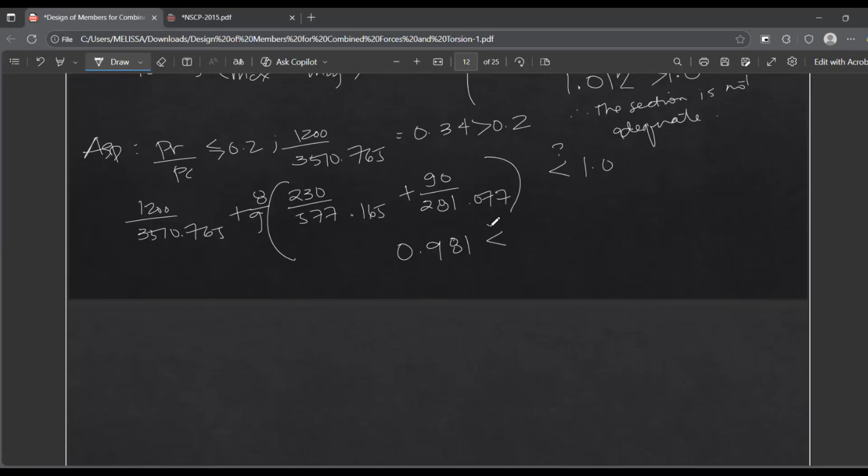Okay, so the answer is 0.981 and it is lesser than 1.0. Therefore, the section is adequate.

So anong ibig sabihin nito? Bakit magkaparehas? Okay, magkaibang design strategy kasi. Okay, so pag LRFD daw yung gagamitin ni engineer sa site or sa design niya, pag LRFD, of course, the section is not adequate, kinulang siya, it is greater than 1.012. Pero pag ASD, yung magpre-prevail or yung gagamitin ni engineer sa design, of course, the section is adequate. Section is adequate.

Anyway, isa lang naman yung gagamitin. If we are designing, isa lang dapat yung magpre-prevail. Hindi po pwedeng halo-halo, may LRFD dito tapos ASD doon, no? Isa lang din, okay. So the engineer will decide what design provisions, if it is LRFD or ASD. Okay, so technically, if it is under LRFD, the section is not adequate. But if the design is under ASD, the section is adequate.

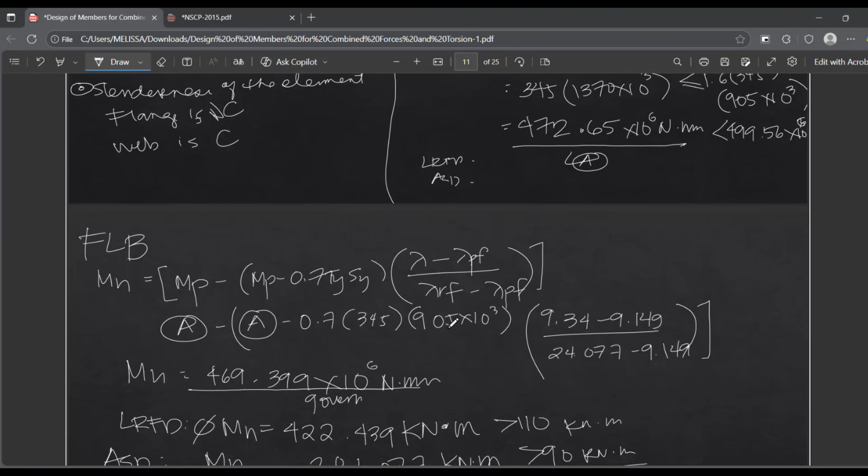Okay, so ang nangyari dito, guys, again, individually, if in-apply natin yung load individually, compression lang, okay, or flexure lang, safe sila. Pero pag sabay-sabay na na-apply doon sa ating beam o na-experience ng beam o column natin, mag-fail siya. Okay, dito sa LRFD, it is greater than 1.0.

So just additional insight, no? Kunwari dito sa may compression. So dito sa compression, kung hindi nyo na-satisfy to, yung 527 is not greater, is lesser than the required, of course mag-fail yan, di ba? Again, dito, if the available is lesser than the required, lesser, mas maliit.

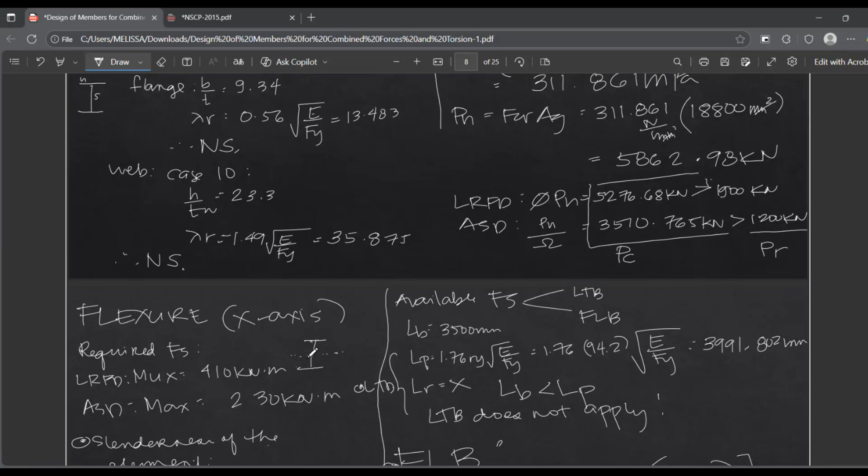Kunwari, ang lumabas dito is 1,800, so that is lesser than 1,900. So technically, not safe na, okay, or inadequate yung section. So pag ganun, hindi ka na mag-proceed sa flexure or sa succeeding stresses, no, or succeeding forces or bending moments, kasi nga doon pa lang sa compression, nag-fail na siya. Bakit mo pa itetest yung flexure or the combination of flexure? So how much more pag nag-fail na yan, di matik, mag-fail na rin pag combination of loads yung na-apply o na-experience ng beam natin. Okay, so do not proceed yan.

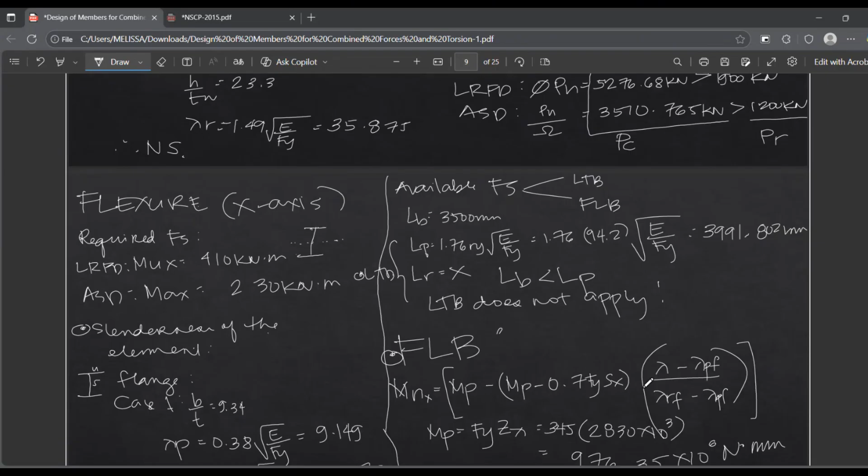Okay, so for the next example, the tension and flexure, no, I will just be giving the solution in the MVLE. Same process lang naman kasi medyo nakakatamad lang, kasi nga natapos na natin yung discussion, ulitin lang natin tapos papasok. Ang bago lang talaga dito is the interaction formula, yun lang talaga yung bago dito. So i-upload ko na lang sa MVLE yung solution for the problem number 2, and then video sa example number 3 and 4. Okay, video po sa 3 and 4.